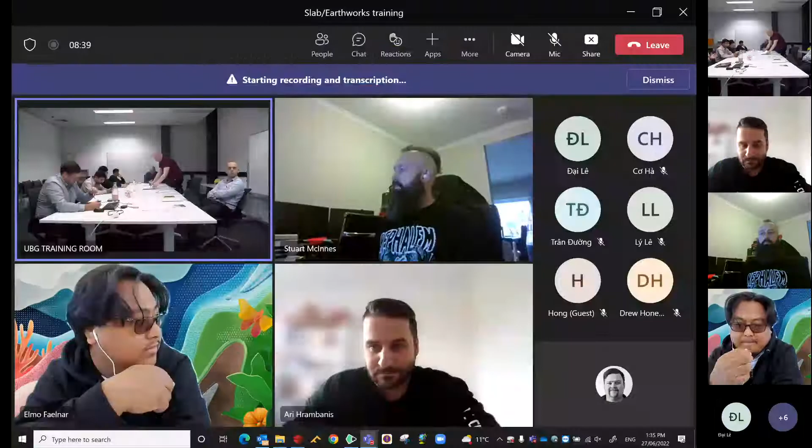So today we're going to go through Earthworks and slab. What did I just change? Slab takeoff and even piers, reading soil reports. Just pretty much everything, but that's a lot to go through. All right, so first thing we'll start with is

Elmo, you want to put yours on mute? Just a minute. The crashing waves are too noisy. What he really means is it's making me jealous. Wish we were.

All right. Yeah, so we're going to just start with Earthworks. Obviously, now that we have fixed rates, they are based on roughly 50-50, 60-40 cut and fill. So if we do have jobs outside of that, if it's all cut, so if the cut line's at the front and the whole rest of the block's cut, you'll still need to send it for a quote.

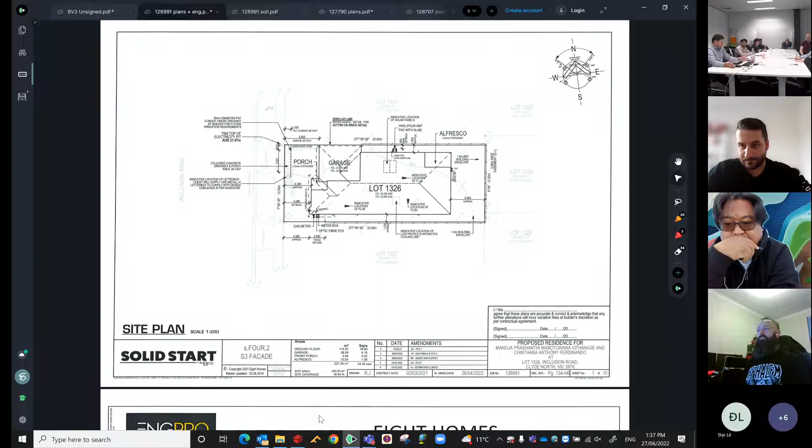It doesn't look like it should be at the front. We clarify and be like, please move this because it affects. Unless it's for driveway grading. Yeah. Yep. That's something to look out for because they can sometimes move it. It saves you a few thousand on your quotes sometimes. Yep. So if they can't move it, then just obviously send it for a quote. Yep. So for example, this job we're looking at is Inclusion, which is the 126991.

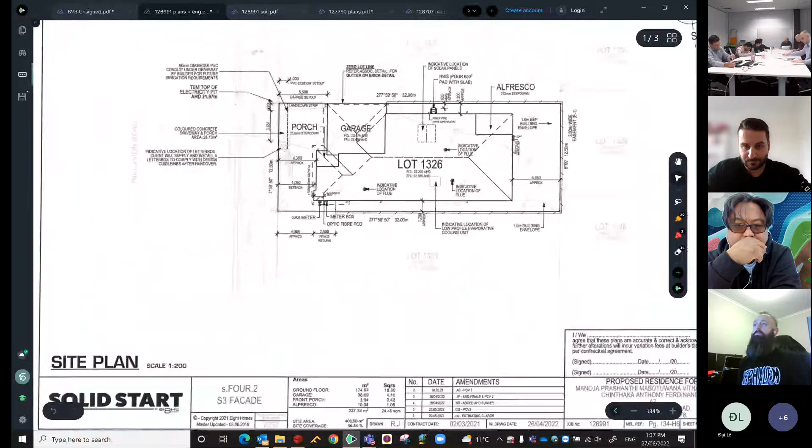So to start with, on the plans it says finished cut is 22.2. So, which is this dotted line. It goes back there and there. Why is that not? Is it delayed? There we go. Click, and it works. It's a bit slower than it was last time. So yeah, that's not a great example because it's probably 70-30 realistically, isn't it?

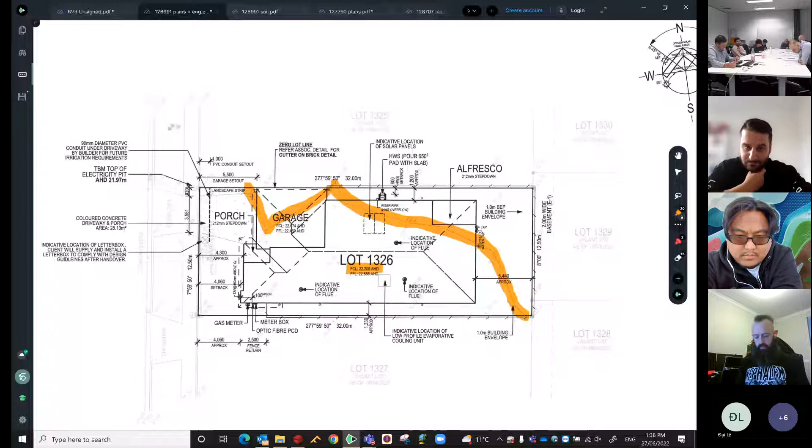What did you do in this case? Pardon? What did we do here? Well, you're still going to have to look at all the levels. So we're still going to look how much fall there is. Now, when we're looking at the fall, we're not doing the whole block. We're just working out the platform. So when I'm talking of platform, I'm pretty much allowing to go that area. There's no point going, we're not cutting all the way to the back fence, so we don't need to allow for the cut.

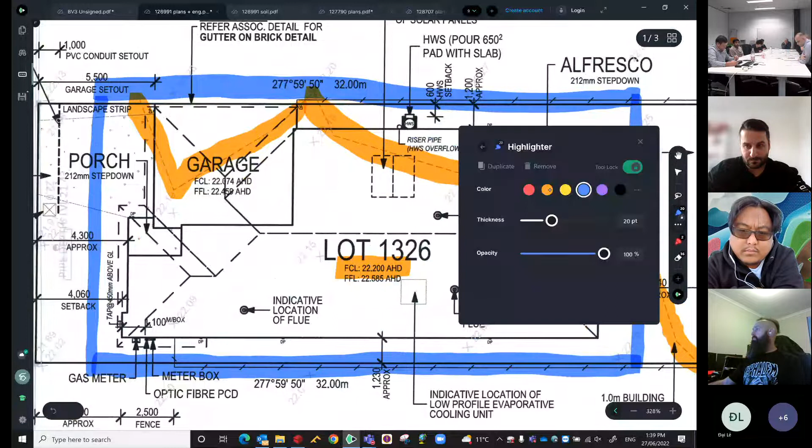So when we're talking, we're just talking a building platform, which is just a bit of a check. Yeah, it's a single. It's only like a metre around the house. So then you're going to try and, from that area, look at what your levels are. So we've got a 22.25 there, 22.16, 22.09. Like going outside it, you've got 22.02, 22.08.

Obviously the cut line is where that's, so by going off that 22.08 to 22.5, we've got less than 200 mil of cut realistically. Them levels aren't real good to actually be able to see them, are they? So for this platform, I'd give a 0 to 200 mil cut, realistically. Because we're probably filling, it'll actually be all right, I reckon, just using the rates, because it won't be exporting. We might have to import though, that's where it's tight. I'd rather still just send the 0 to 2, and if the ETO comes, I'd rather pay it that way than actually over allow. Overpay each time, yeah.

Yeah. So can you maybe draw one on the screen just with what a cut line would look like if it was definitely have to be? I've got another one. Oh yeah. That's why I said we've got multiple ones here. I've got a lot of different allowances. I see. So for this one, we just say we'll allow 0 to 200 mil cut.

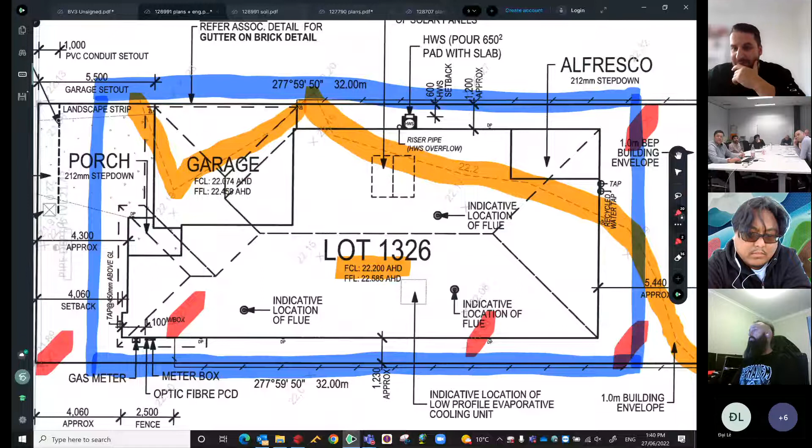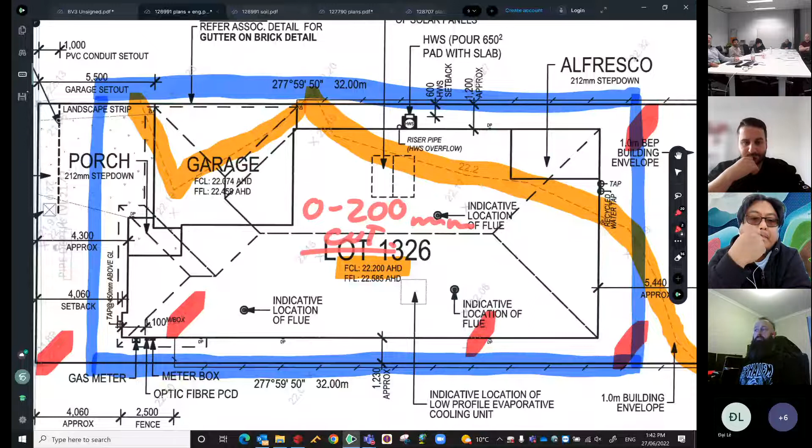Then I've got the engineering as well. Damn it, that's upside down.

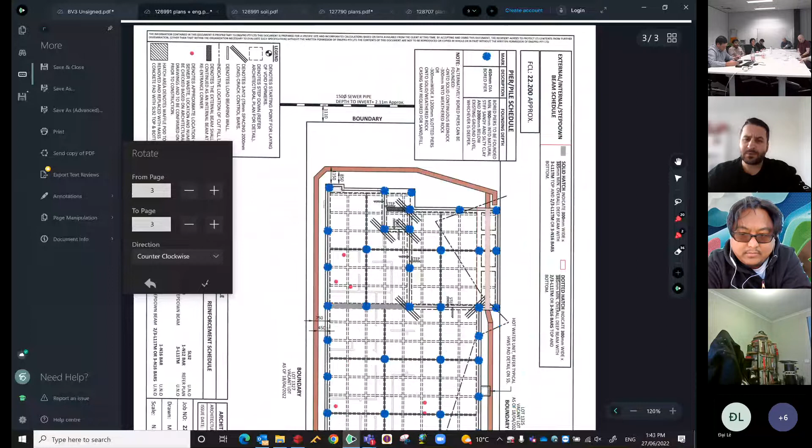And you've all got the soil report for this job as well, which is Inclusion, sorry. On the front page, obviously, P due to fill, quaternary deposits, so there is rock. The next page of it just shows where the boreholes were dug. And then I'm going to go to the third page of it, which is the depth of the bore log holes. So I'm going to bring it up.

So the things I want to explain on a soil report is explain what terminated means. So terminated means that they've stopped drilling. So they'll stop at 2 meters if they haven't got anything. So when it states terminated, that just means that they've stopped and you can still go further.

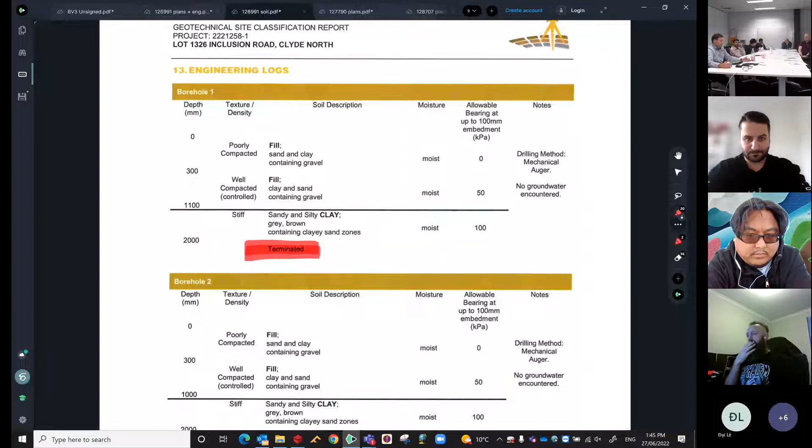So if, for example, we have piers on this job like we do, just flick back to the end, and it states, luckily enough, that they're 2 meters deep. Once it loads, the piers have got to be 2 meters deep, which is how far they drilled anyway. But if that said 2.5, for example, then we would still be able to drill the piers at 2.5 meters deep. So terminated means just that they've stopped.

Refusal, which I'll show you on another soil report, means that they've actually stopped because they can't get any further down. So the difference is refusal, we need to calculate the depth of the refusal to work the piers. When it says terminated, we have to go off what the engineering states how deep they need to be. So for example, this one, all these piers are going to be at 2 meters deep. All right.

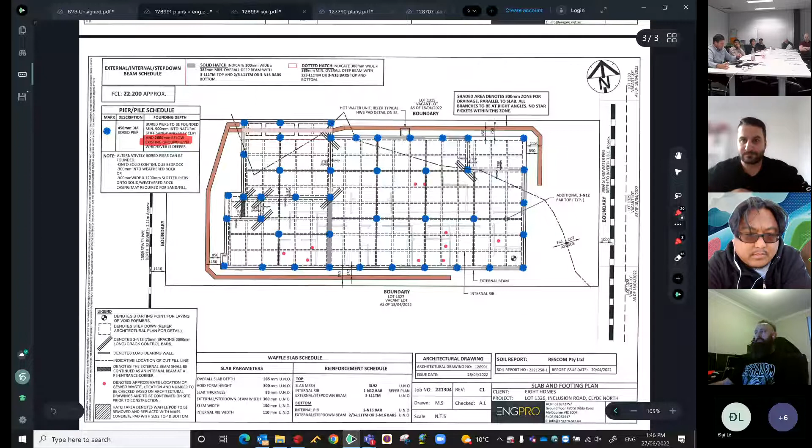So on all of them, all 3 holes, it states terminated. So we can go to the depth of 2 meters as per the engineering. That's just probably the terminology. If for some reason we have seen it before that they've got terminated, but they're all at different depths, usually we'll go back and clarify it with the engineer because it's probably wrong, that it should state refusal. Yeah, that happened to a job a couple of weeks ago.

Yeah. So they've usually been told to drill to 2 meters. That's when they stop. So unless it stated refusal at 2 meters, we know there's rock. But when it states terminated, simple, they've just stopped drilling. We can still drill further. So if we see a 2 and then a 2.5 and then a 2, do we just clarify, send it back to the engineer? More so if it said 1.8, 1.5 and 1.1, but it stated terminated. Yeah, that's where I'd be querying.

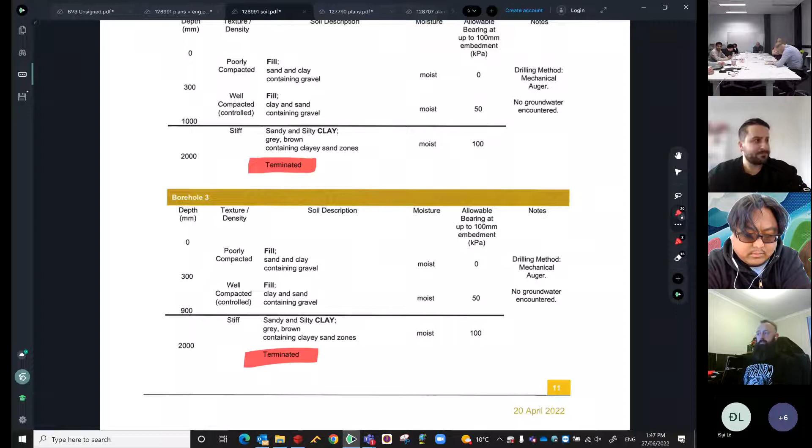Yeah, okay. But if it was 2 and 2.5, sometimes they do drill deeper. The only one is if one stops really early, you know, they usually hit something. Yeah, that just means when they've typed it up, they've done it wrong. Yeah. So on this job, all piers can be as per the engineering at 2 meters deep. So we could... freeze on me.

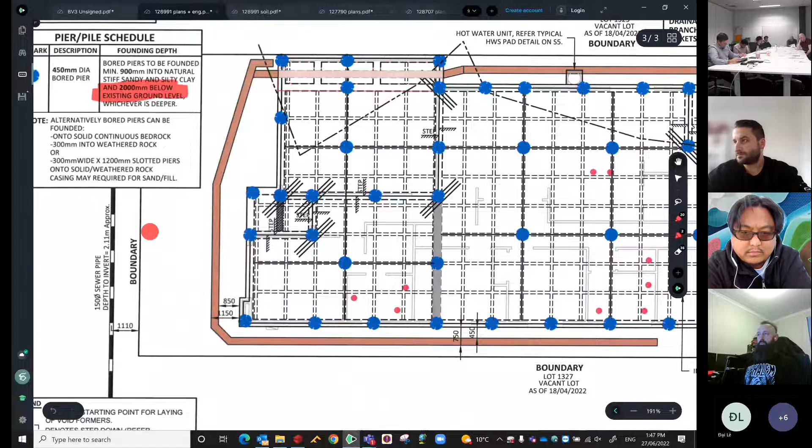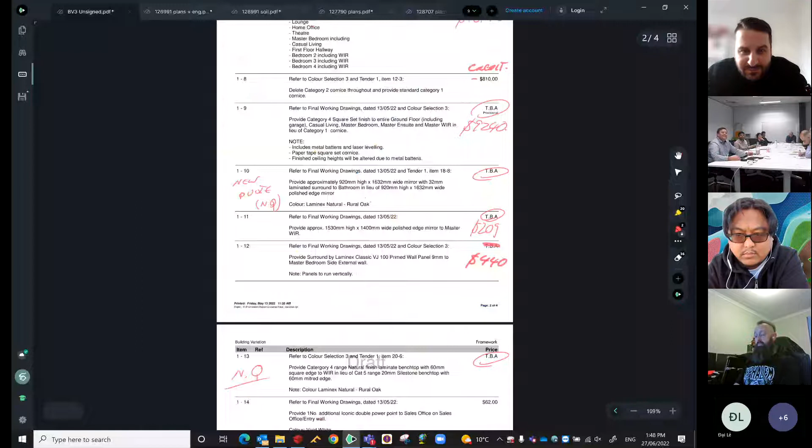So you can, use it still on my other document. Still on the tender, yeah. Yeah, it's coming. It's a BV. There we go.

So there's 42 piers at 2 meters deep. By putting it into the takeoff, it's going to work out the quantity, but we already know that there's 84 linear meters. So that's piers. When we are still doing slab takeoff, the other items we need to allow is...

Just a quick one on the piers. Are you going to add additional for the fill of the lot? Not really, because it's still going to be dug to 2 meters. So it's still going to be average. You still think it's going to be an average anyway, because even with the cut and fill, you'll be doing these after the cut, so they should all still be 2 meters.

Yeah, it was just like if there was a job that was close to the corner, and the majority of it was fill. Yep. So by the time you got to the corner of the lot, say that was 500 higher. Would you be making those piers deeper to factor the fill? Yeah, you'd probably work it out, maybe still put 200 on top.

So, because not all of them are going to be 500, it's only that far corner. Yeah. You can still work the average. Because I'd have done it the same way you did for this one, because it's pretty close. But if it's an extreme, you're happy for us to add fill on top of it. Yep.

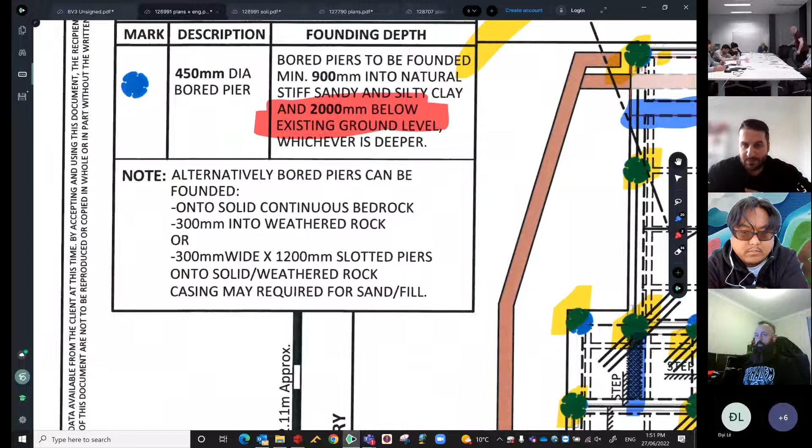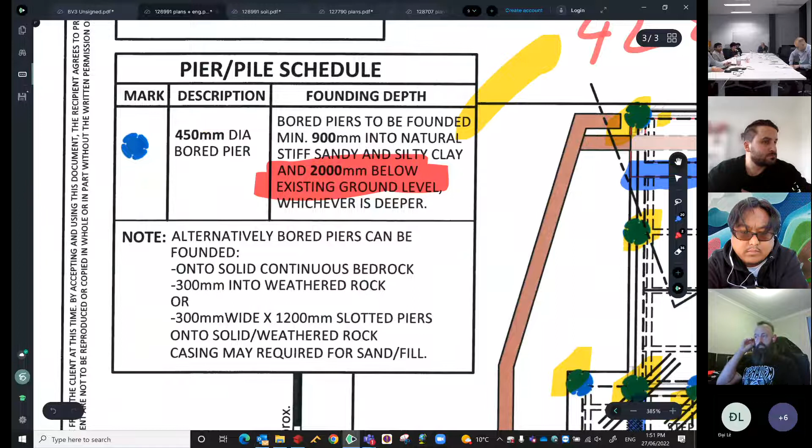All right. So we're going to continue with the slab. So we have, it's a 4B, N16. Come on. There we go. 3 L11 trench mesh to the top, 2 to the bottom, and N16 and SL92 is a 4B.

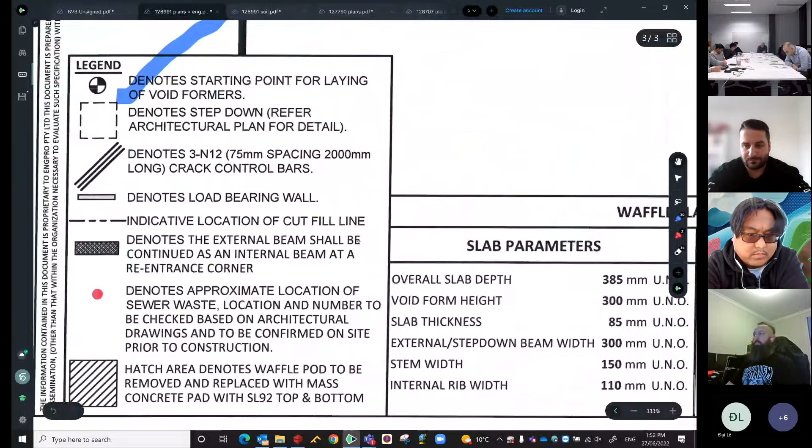So obviously the rate includes the external perimeter of the trench mesh. So the spots that I've highlighted blue, we need to add the additional. So it's got to be the same as the external. If you read the note over here, so the hatch section denotes external shall be continued the same as an internal.

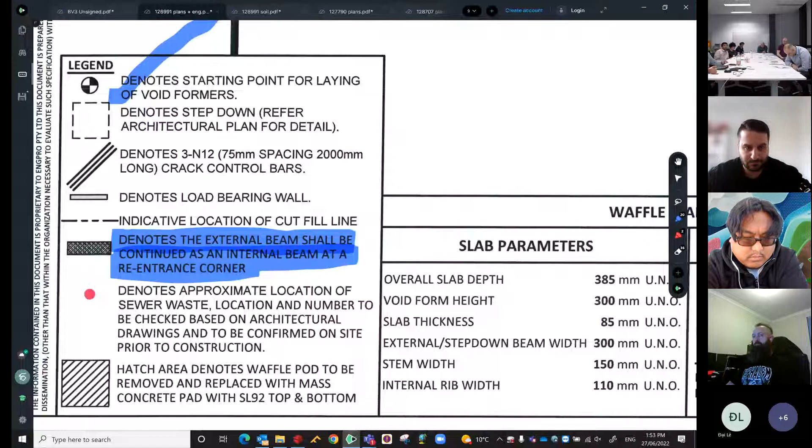So that means that we need to allow the extra trench mesh to go there, and we need to allow 3 layers of it because there's 2 to the bottom and 1 to the top. So by adding the lineal meters, why I'm not having the garage external is it's already included. So it's just the internal ones that are the same that we need to work the extra trench mesh for.

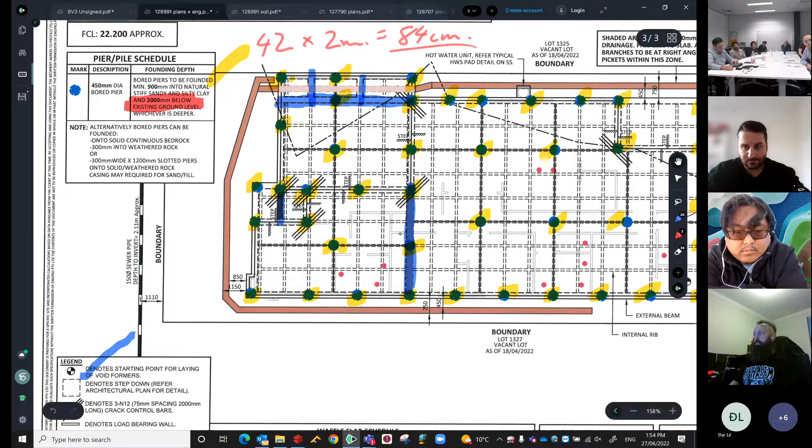So there's that one to the porch, there's the one going across the rear of the garage, and then the garage length plus the 2 going to the external garage wall. So you just work the lineal meters, so 6.5 for the garage wall, adding 1, so we're at 8.5, so we've got the garage covered, adding another 1.5 for that porch, so we're at 10, and then 1, 2, 3, 4 at 1.2, so you're adding about 4.5 meters for the rear of the garage continuing through.

Just so we're clear, because you're working out 1.2 meters per waffle pod, correct? Correct, yep. So the pods are 1.09 and the internal rib's 110. So just by calculating how many pods there are, that's how I'm calculating the length. Correct. Except for if it's cut, you can see the ones that aren't cut.

So for this, I should have brought a calculator again. So we're at, what did I say, 14.5. You times that by 3, divided by 5.4, tells you you need to order 8.05. So you round it up to be 9 lengths. Or I'd probably round that down to 8. That one's close enough to being 8 because you were allowing a little bit extra anyway.

So as it states up here, it tells you still 300 mil wide, 3-L11 trench mesh top and bottom. It's exactly the same for both of them. So just write down, you're gonna add 8 trench mesh. And we obviously have to order full lengths of trench mesh. We can't order half the length of trench mesh. So that's why we round it to the full number.

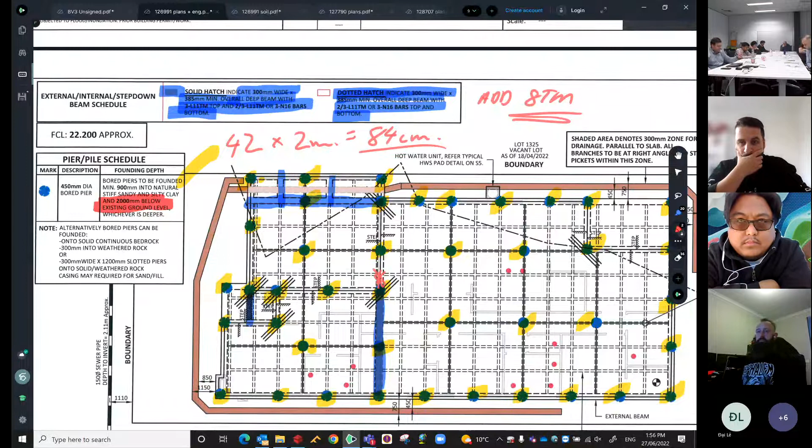Okay. The other thing we need to look at on this engineering is, because we've got piers, we've got N12 bars on top of the piers that we need to add and calculate in as well. So I used to do the same method of just working out by pods, because you're going to go 1, 2, 3, 4, roughly 4.5 pods is 5.5 meters. 2 dotted hatches, number 2 on top.

There you go. I thought Stuart was trying to say something, but you could barely hear Stuart. Oh, really? Yeah. Crank the mic up.

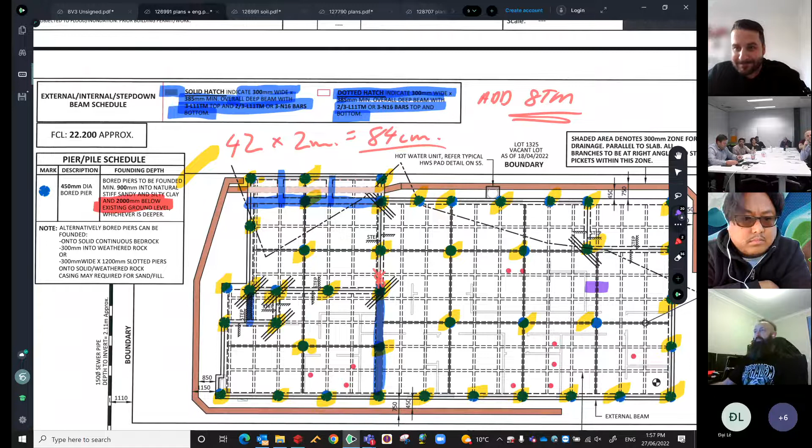There you go. So Stu just picked up that 2 top. So that was the garage one. So the garage one, I'd be adding 2 extra lengths, sorry. So we've got 2 top and 2 bottom for the garage length. So that would alter 8 to be 10.

Because we're adding an extra 6.5 meters plus 1 plus 1. You're at 8.5 meters, and they're 5.5, so we'd be rounding it up to another 2. So 10, we'll order 10 trench mesh. Good pickup, Stu.

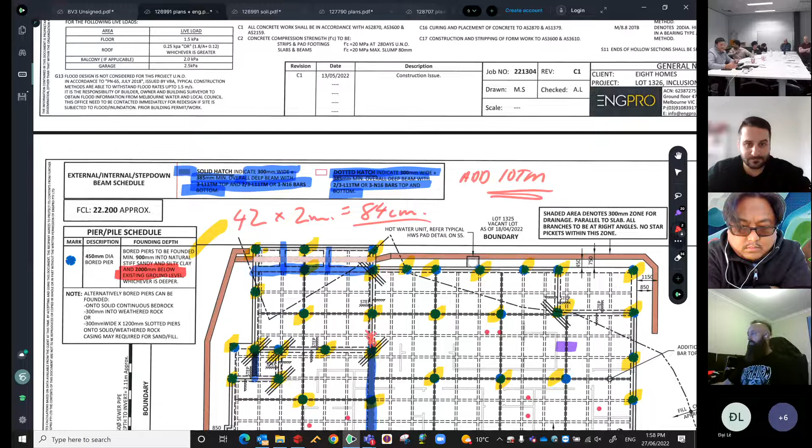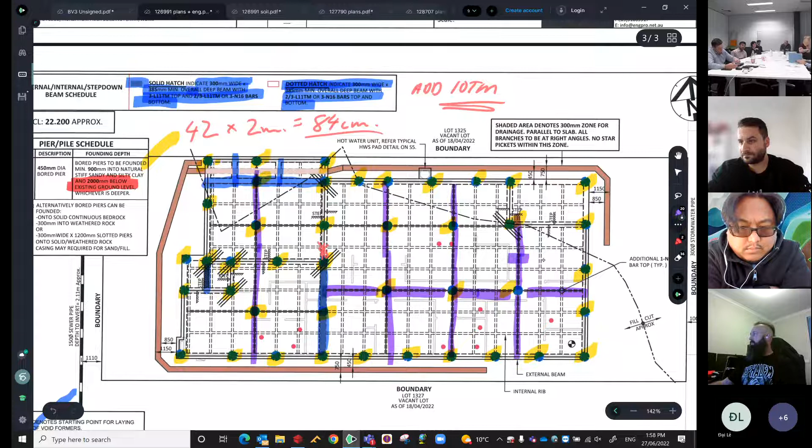So then we still need to add the N12 bars, so these black lines that are on top. So we need to work out how many. The other thing you could do is work out the width of it. Pretty much it's going to be 2 across, and just count them across. So 1, 2, 3, 4, 5, 6, 7, 8, 9, 10, 11, 12, 13,

14. So I'd be allowing another 14, but we obviously have 5 as standard, so we're going to make it 19 we have to order in total. So I'm going to add 14 for that.

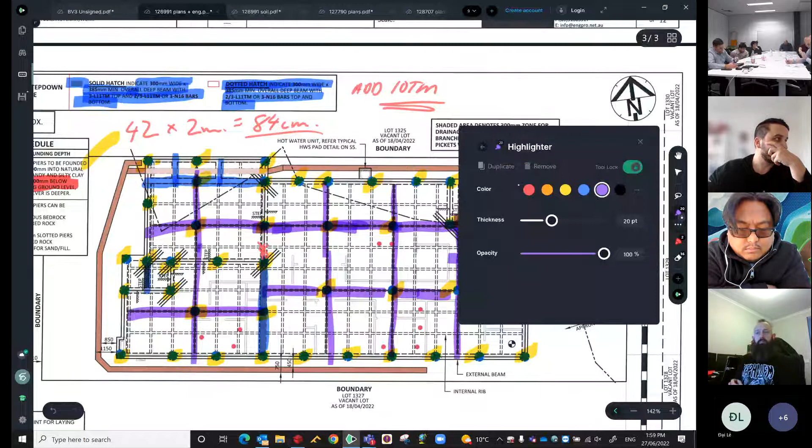Down there's probably around the alfresco, that front pier. You look across the front of the garage as well, there's a whole one there as well. I think across that whole front would be bulking, it's the same setup as the garage. Yeah. Yep. So same, we're going to just work out from that the linear meters by 300 by 300 to add additional concrete into the slab. And that's just bulking.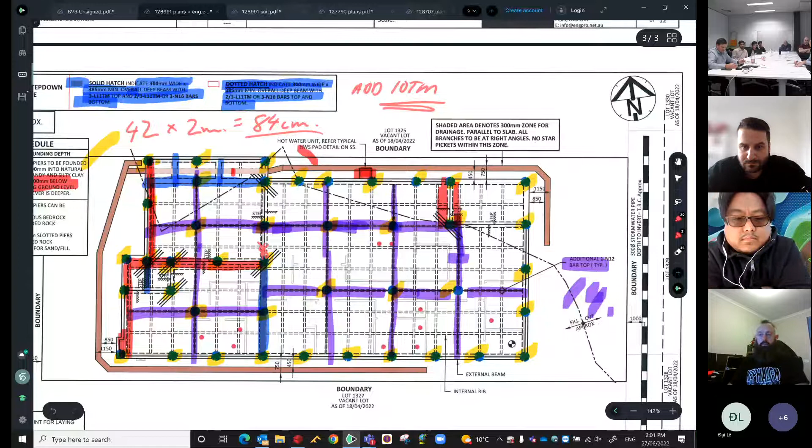You've got your meter squared rates for the rest of the slab. This one, we don't have a condenser pad, so we don't need to worry about that. But it's the same, even for bulking, you could add an extra meter for the concrete going on for the hot water service as well. And you're just double checking that there's nothing else that we need to be adding, and that would be that job done for slab.

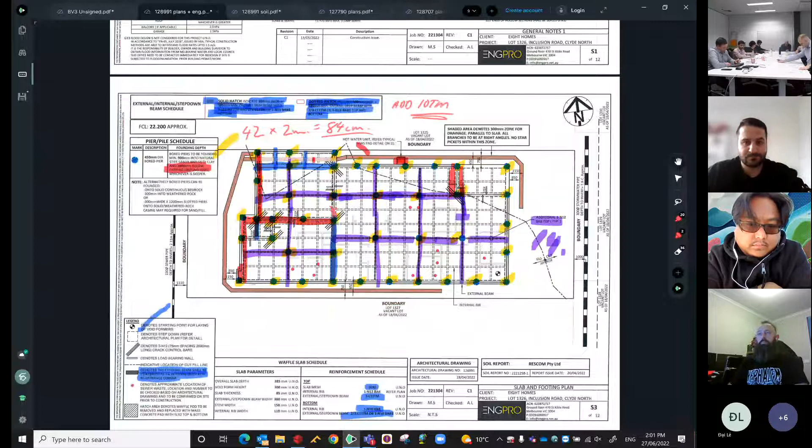The next job we'll just look at, site plan, is 127790, which is 1455 Hardwood Grove. This is just a site plan. Now, this one we're just going to look at the cut realistically. As you can see, the cut, you look at the level on the porch, under it says lot 1455, it says the cut is FCL, finished cut level is 100. So the dotted line that they have at the front of the block is at 100.

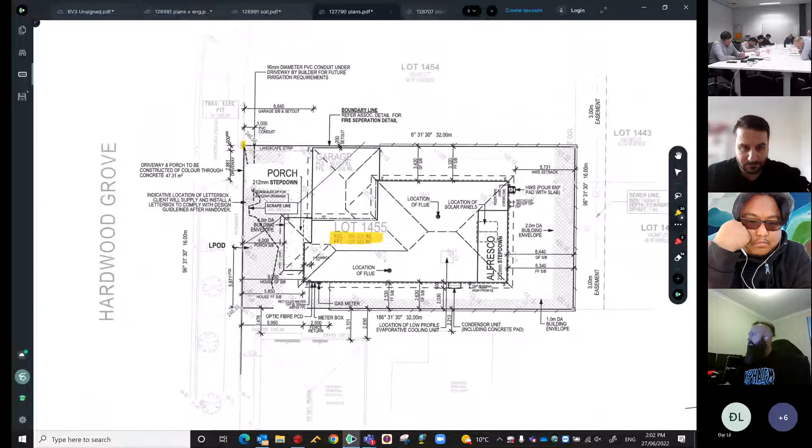So this is where we're saying we're not at 50-50, 60-40. Now I was a bit cheeky with this one. I tried to put it through at the cut level, how much falls on the block, because it's pretty much just a scrape, the whole thing. Yeah. But obviously, because they're taking more soil away, they hit us up for an extra, didn't they, Ari? They sure did. Hit me up this morning for an extra 1,200. So 1,200, just pretty much getting rid of the soil. Yeah, I think they calculated 140 cubic meters of soil exporting.

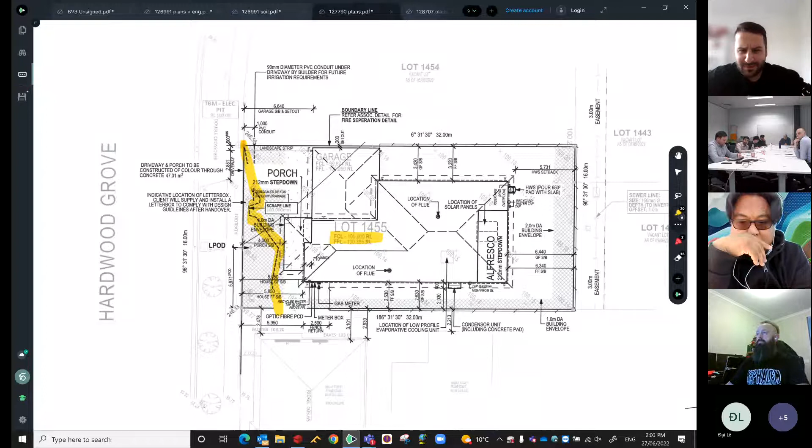But yeah, it's the same principle again. It is a single, isn't it? Just double check. No, this one's a double. Okay, so it's a D6. So the platform, realistically, we're going to allow is 2 meters. So we'd be allowing pretty much 2 meters all the way around to work out the platform. And as you can see, if the cut's outside of that as well, it's telling us that you're pretty much cutting the whole platform, which we are. So for this example, we would actually just need to send it off for a quote. Yeah. Right. There's not much else we can do.

You can go back to the drafty and ask the question, exactly right: why the hell have you cut it there? Because to me, there is no reason to. Explain to me why it's there. The only things that I could think of, especially with these double stories, is wall heights and setbacks and all that sort of stuff. But yeah, we can just ask. But that's the same thing though. If there's a wall height on the garage wall, you can just move it over. They've got an eave across the front. We can run an eave down the garage.

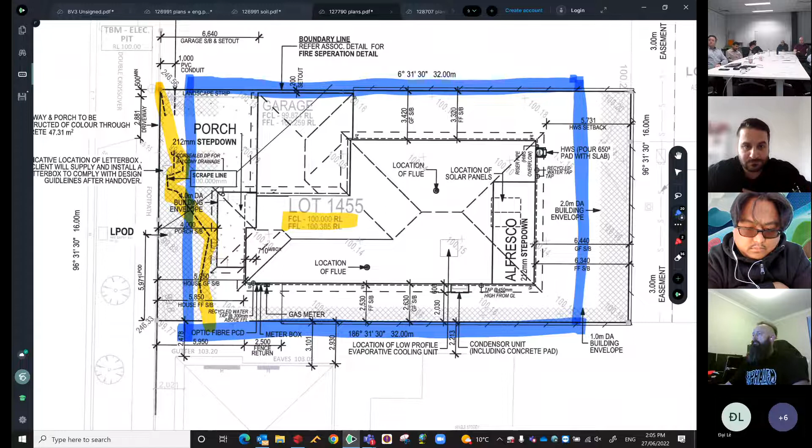And it's not an eave, it's actually, so we're sitting on the tails, you'll have a rake on the ceiling in the garage. So it's possible to get away from it, but they've got to learn that they're costing us by doing that. Yeah. That's the big issue that I need to sit down with drafting and have a chat to them. I was going to get Brownie involved as well. Yeah, have McCabe, Solomon, and Hayden. So if that's the whole reason they've done it, that garage wall and boundary, then they've just cost us more than $1,000 realistically. Yeah, it was 1,200. But it still would have cost me probably about $250 to do the rake on the garage ceiling. So still, it's about $1,000 it's cost us, just by the way that they've drawn it.

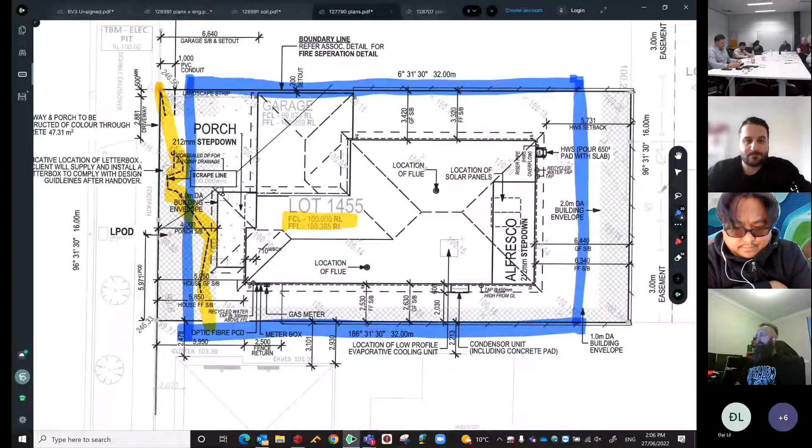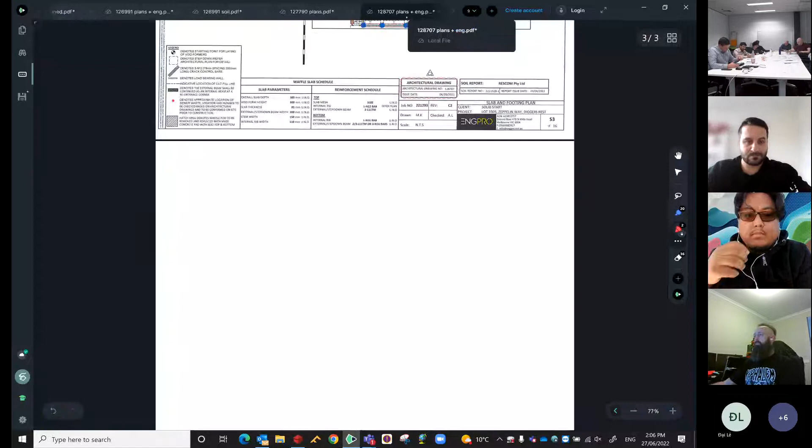Yeah, I think it's definitely worth a clarification each time. Yep. So if you've got it, always clarify it. That's a good point to make. And I'll be taking these examples back to them. So that's just one site plan that we would need to have definitely loaded. All right, I've got another one that's just a site plan. Nope, not that one. Smokehouse. Which is 13263, and that is Smokehouse, correct.

So this one's a single story, so an S8. Where'd you go? Now we obviously have, this one's got a big block because we've got a 14 run to the back of the house, to the back of the block. It's a great block. The block is 723.

So the inclusions that are on the site cuts is up to 450 meters squared. So we don't need to pay additional for this one because we still only work the platform that we're cutting. We're not cutting the whole entire block. So it's a single story. So we only need the meter around the outside. So the block is bigger, yes, but we don't need to for the site cut. We're still only working a platform.

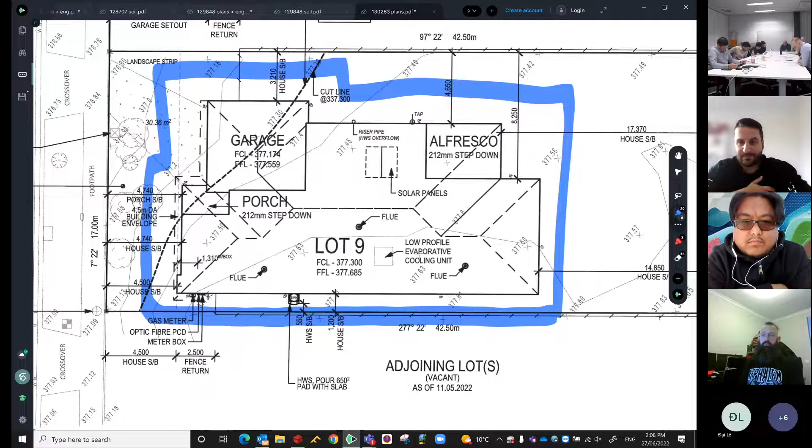Now, that cuts pretty close to the front again. Yeah, I got an email from Marvel. Yeah, again, it's questionable. We just send it off as it is and then see what happens. Like you said, if it comes back with an ATS, then it's a good ATS because we tried to get away with the fixed rates. Yeah, we're trying to get away with doing it as tight as possible, realistically.

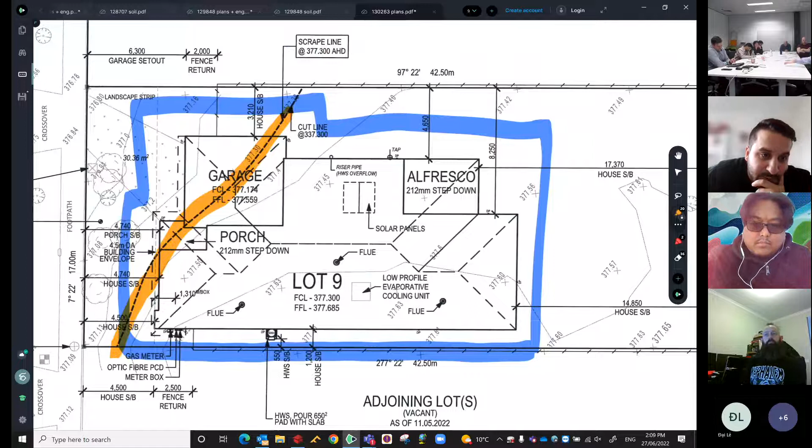Again, it's probably like, can the cut line just have been moved over to the 377.4? You know what I mean? Or yeah, that's just the same thing, questioning. Like to me, this one has got, let's see, 377.3, 376. So I'm tipping they've cut it there for driveway gradient, because if you look at it, the street level, 680. It's about half. Street level there is 376.78. Yeah. So you've got 500 mil plus the slab on top, you're at 8.

You could, but your setback is 6.3. So you probably still could have gone back further. Yeah, you could have gone back at least that. Yeah, definitely 100 mil. So, but yeah, we would still then just look at the levels that we have inside. So 377.61, 377.56, you're 45, 377.16, 377.2. That's 775. So realistically, 16 is probably the lowest, to 50, 60. So you're at 400. You'd be at probably 4 to 650. That one is 37.75 and the house is at back.

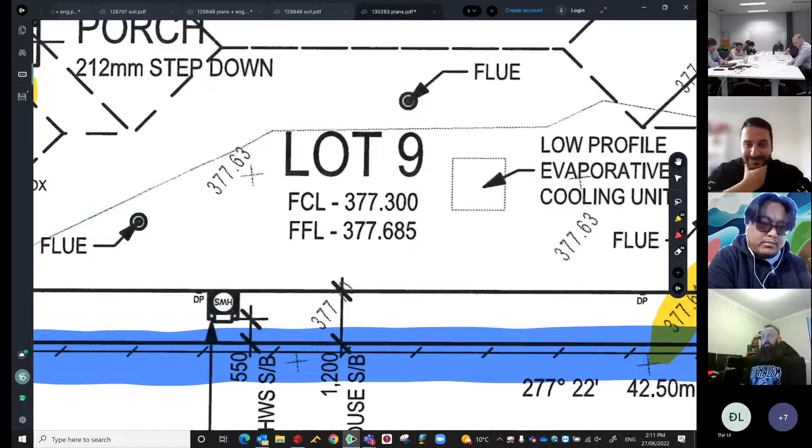Is that 7? I can't even see that behind that dash. It could be, but yeah. Well, that's our excuse that we'll go back to. Can you tell me what that is? Yeah, it probably is a 7. Yeah, it probably is. But even if you did go to 7, realistically, you're still falling the same, yeah. So you've still got 650 up to 654 realistically.

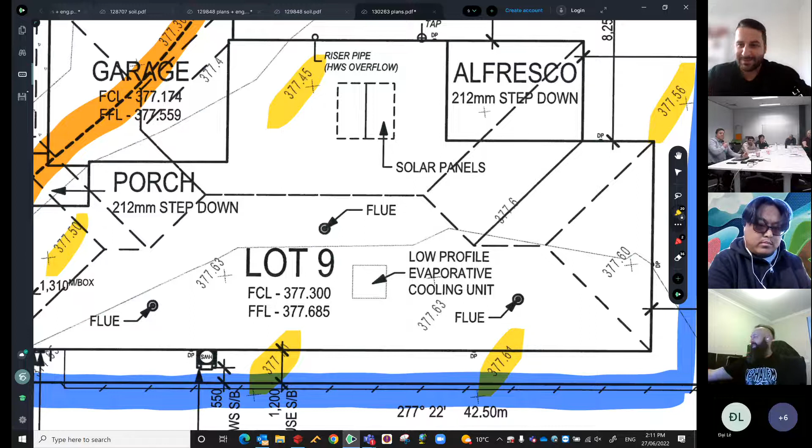Yeah, just double check it because I had one from Marvel saying, "Oh, this one's 400 to 600," and I looked at it. I'm like, "No, it's not." And then they're like, "Oh, yeah, my mistake." So don't be scared to double question it as well. Yeah, they're only going to try and push for more money, realistically. If we can push back, you can always flick it to me. I'm always happy to argue with people.

So, yeah, for this one would be 4 to 6 ordering that, and hopefully we're getting away with the cut, but we would say, yes, we want to clarify that cut level. Just to move it back that touch would be even better. Like even if you could try and say, cut it at 377.5, you're in between. If you're cutting it at 377.5, you'd be going through that section, which you're almost at 50-50. So you can use the rates. Helps everyone.

Yep. So it's just knowledge of looking at the cut, and drawing that box actually helps the platform to say, right, you can see how much of the platform is where the cut is and how much we're filling and how much we're cutting. So it's a good guide to look at it that way. All right, so that was just another cut one. Another one to question drafting. All right, go back.

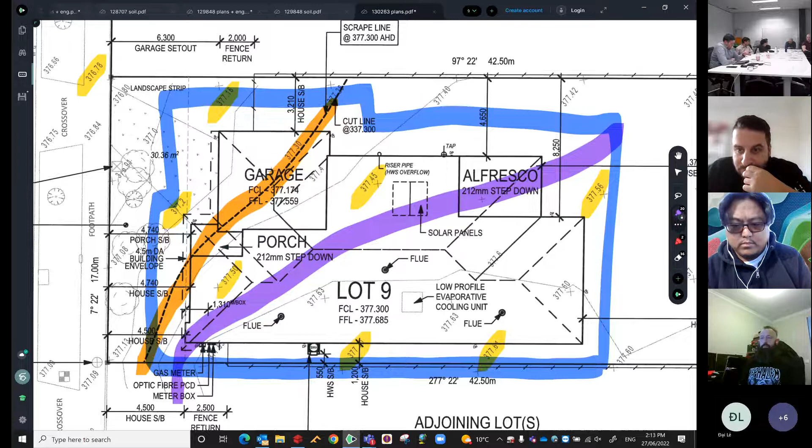That's a good question. Some of them are, some of them aren't. What was the question? Are drafting aware of what we do, realistically? Yeah, like our parameters for it. Which I've been giving feedback to McCabe's team on, because he hasn't been doing anything. Where he's been cutting them, I've had to go back at him and say, well, work out your driveway gradient and then tell me if you can cut it there realistically, because he can't. He's not always looking at that.

Sorry, just a random question. Have we ever built a house where we've dropped the garage to deal with driveway gradient? Is there a reason why we don't do it more often? Yep, it creates issues. We don't do deep edge rebates, or we try not to. Our concreters hate them. It causes issues, obviously, because we're cutting two different cut levels. Where's the water go? It goes to the lowest point, so it usually goes under the garage if it's not getting rid of it.

That was one thing they were drawing that I've told them not to draw ever again: deep edge rebates. They were doing it so they didn't have to do retaining walls. But our process here is we retaining wall a level platform, then we build a house on top of it. So if you come across any with a deep edge rebate, clarify it. Is it for warranty? It's mainly just to keep our concreters happier, because I've seen it drawn and they miss it, and it causes more issues.

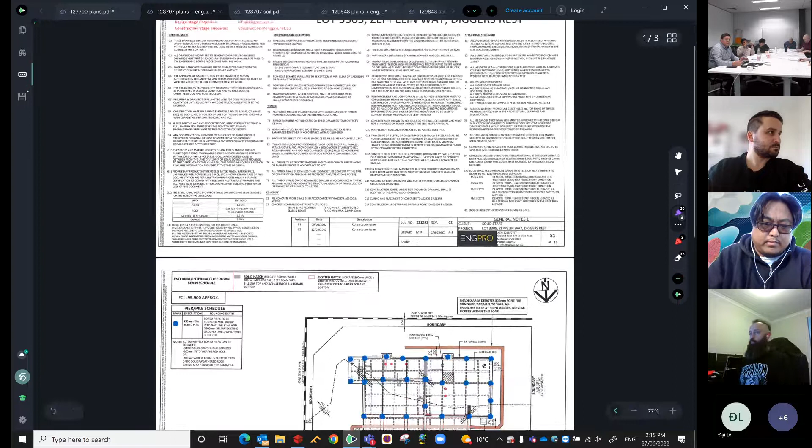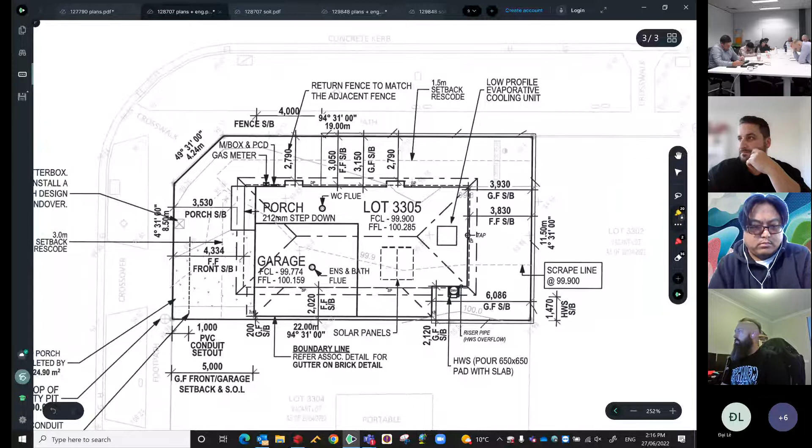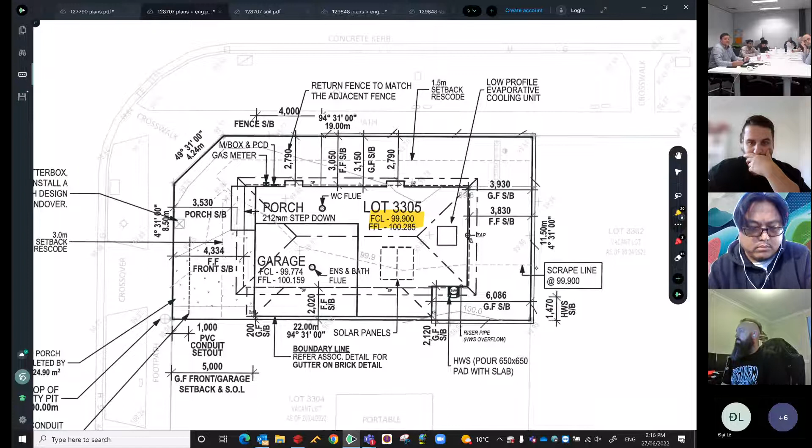All right, we'll look at this one. Obviously I scanned this one in the wrong way. Zeppelin Way, Diggers Rest. This one's a Zooey 121, so we've got a double story. The finished cut level was 99.9. This one is all good, in my opinion, to use the rates once it draws the rest of it. There we go. You can see it's close enough, 50/50, 60/40. I'm happy to use the rates for this one. It's a double story, so we'd make sure the platform's got a 2 meter platform around it.

We're going to look for the levels inside the area. Still waiting for it to zoom. I'll start marking up the levels anyway. At that point down the very bottom, we've got 100, so we're cutting at 99.9. At that point there, you're at 99.8, so we're at 200 mil. You're at 220 now with that level at 99.78, so we're going to be over the 200 mil. So we'd be using the 201 to 400.

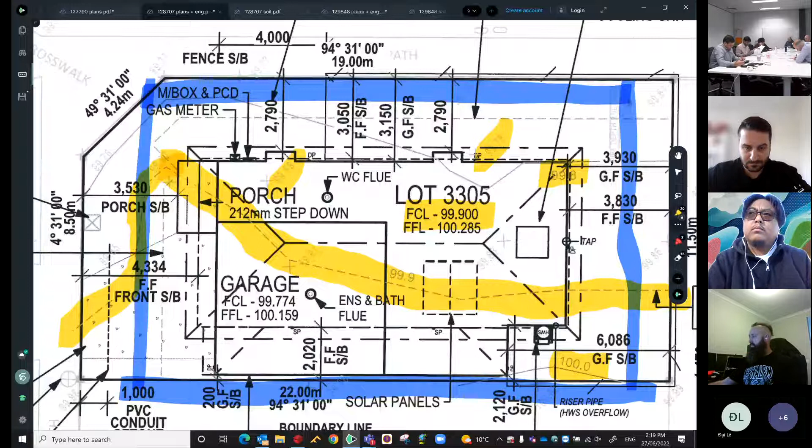From this we go to, sorry, this goes to 2, 3. Training at 3 o'clock, it's booked in. They're all booked in for an hour and a half. I think someone had it after us. I just wanted to make sure we're not going to run them over. Okay. All right.

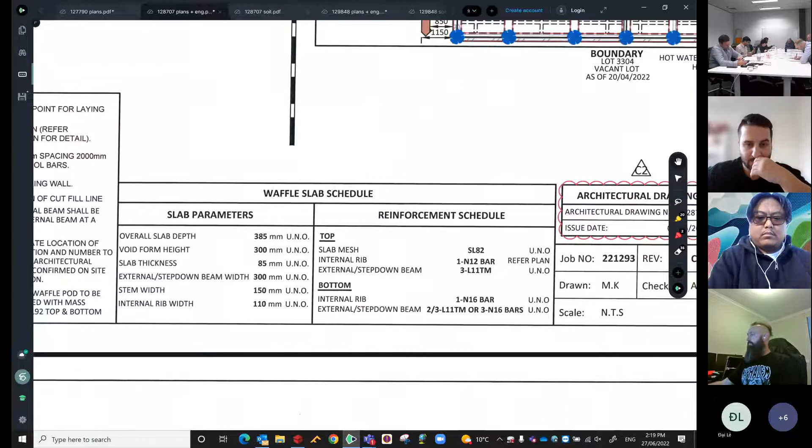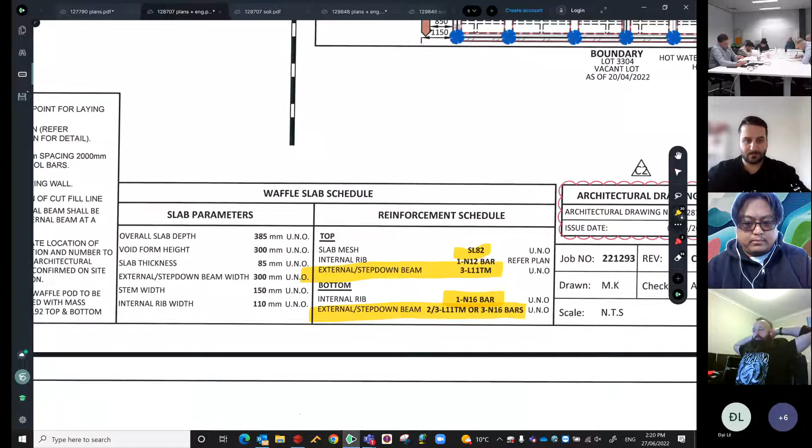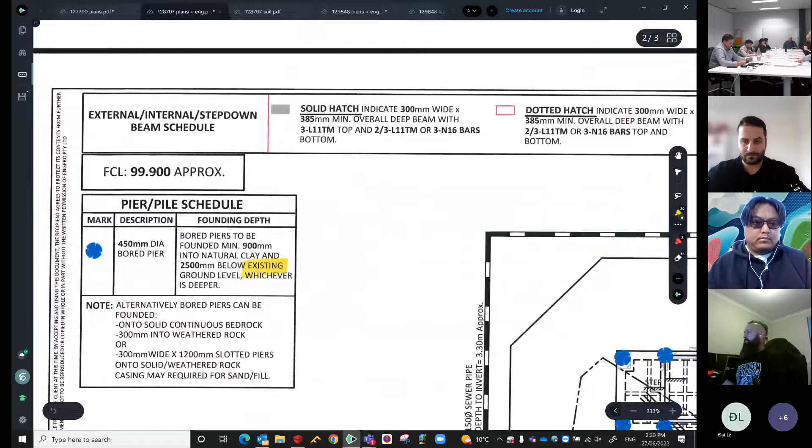Mostly you'll find they are the same slab, a 4B. Obviously this one will downgrade the mesh because it's an 82; the 4B comes with a 92. It's a 4B again. It's got piers. This one states to be 2.5 below existing and 900 into natural clay. So we'll go to the soil report. That's not the garage, is it? Yeah, that's one. There we go, Zeppelin soil report.

Now, looking at this, come on, scroll. Why are you not moving? Should we be looking at the borehole? There it is, it's finally come up. As you can see on this one, it states refusal on moderately weathered basalt or boulder, so we are hitting rock. The first borehole stopped at 1.3, the second stopped at 800, the third stopped at 500.

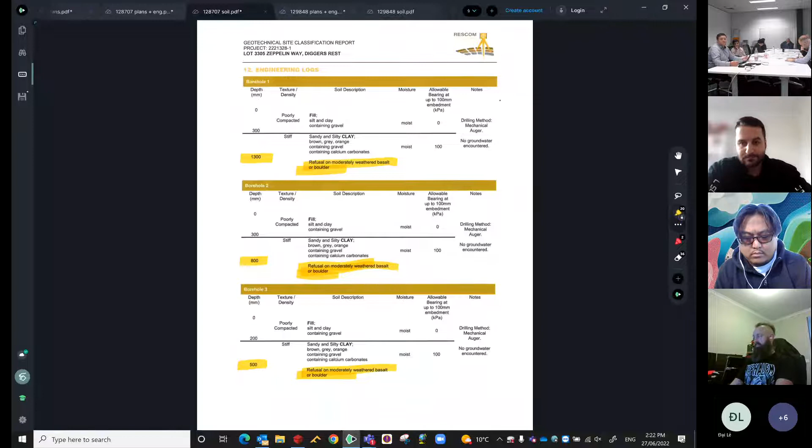So for the piers for this job, I average the depth. We go 1.3 plus 0.8 plus 0.5, which equals 2.6. Divide that by 3, so you're at about 860. I'd round it up to 900 mil. So you work out the boreholes, and the piers are at 900 mil on this job. Everyone good with that? So we go back to the engineering.

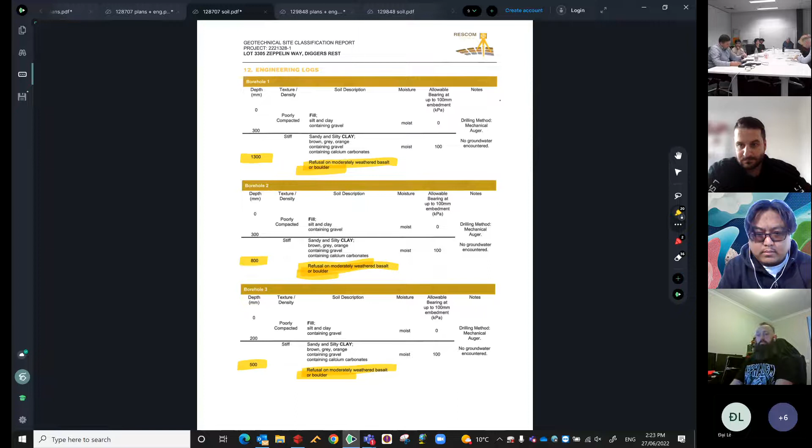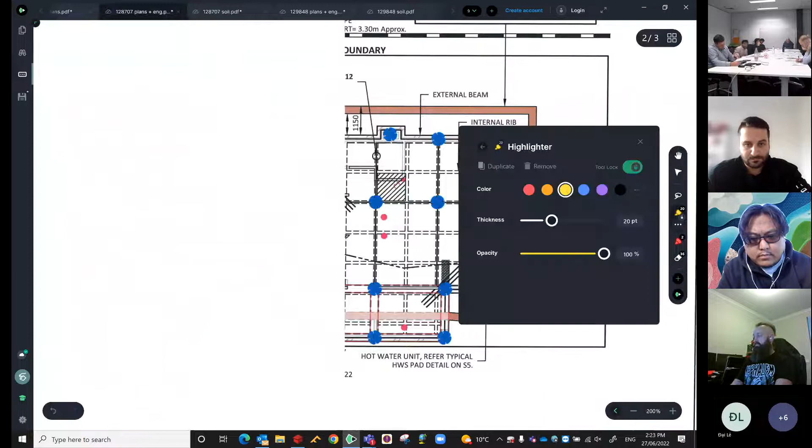Count all of them. 1, 2, 3, 4, 5, 6, 7, 8, 9, 10, 30. So there's 30 piers, times it by 0.9, there's 27 lineal meters. So that's what we'd be allowing for in labour. So 30 times 0.9 equals 27.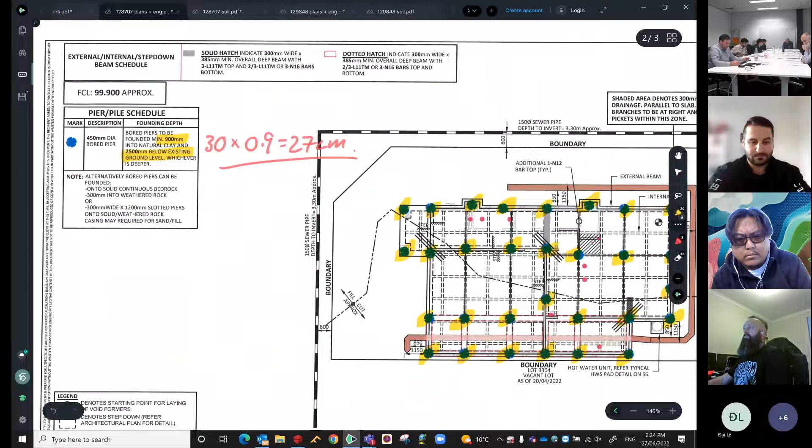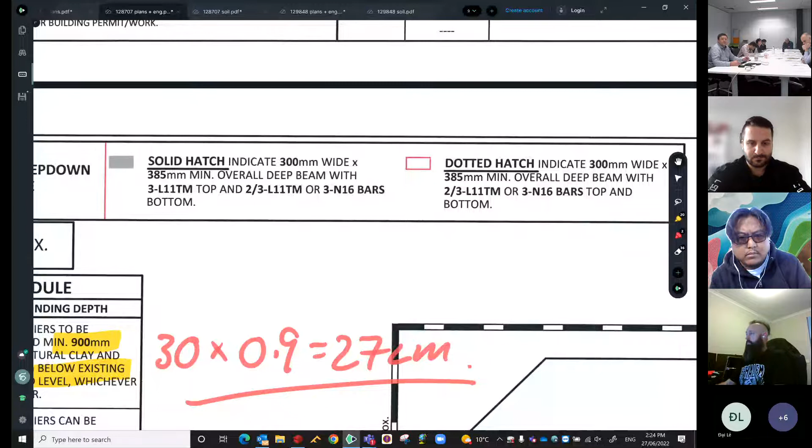That's all we work out for piers on this job. Then we'd be looking at the same again up the top, the solid hatches. This time I'll double check them, Stu. Actually, the same one, the clear one with the red line, states 2 311 trench meshes, top and bottom. And the solid hatch states 311 to the top and 2 to the bottom. So I'd work now that you picked up that they're different.

We'll do this one. This one's blue. That one's purple. So purple one's the rear of the garage again, plus a re-entrance. So realistically for that one, you'll be looking at 3 meters. Hold on, it's still freaking slow.

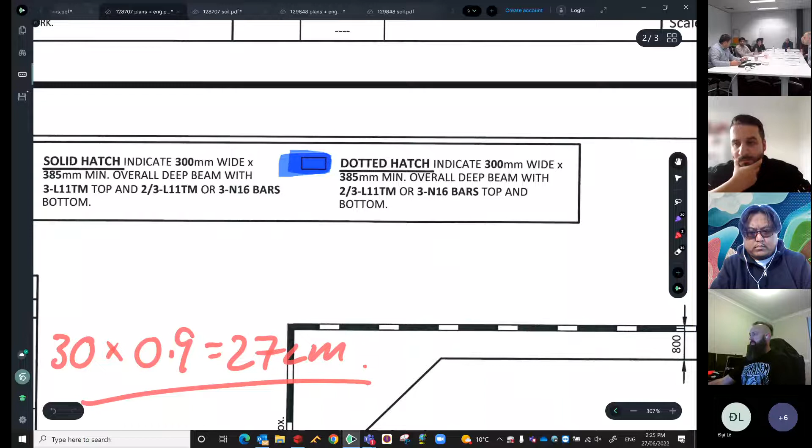Hey Steve, you know that 900? Shouldn't we add the extra 300 in the note? You pretty much, they'll probably change them to slotted on site realistically. Yeah, because if it's not all of them will be, who knows? If all three boreholes have hit, then yeah, there's rock the whole way through it. It says weathered basalt or boulder, so a boulder you're not going to go 300 mil into. So more than likely they'll change them as well. They'll go to slotted because they won't dig into the rock.

Yeah. So I usually just go to the rock, and I don't think there's been any issues for them chasing us up for those extra linear meters if we don't go 300 into the rock. No, because they're not really gonna sit there and drill into the rock. Yeah, because if you've got 30 piers, they should be chasing up for an extra 9 linear meters realistically. So we're getting away with it. But it's a site condition anyway if it does go to slotted piers. Yeah, correct. Don't be starting a precedent.

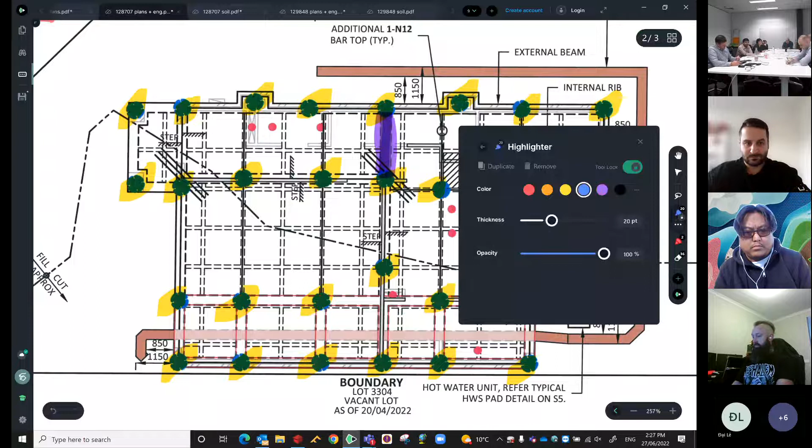Alright, so on the purple, we'll go 3 linear meters, 3 by 3. So 9 linear meters, you're gonna need 2 lengths of trench mesh for them. Whereas the other one, which was blue, we're gonna go 2, 4, 6, 8. And I believe it was about 13 meters across there. So we're at 21 linear meters. 21 times 3, 63. 63 divided by 5.4 to work out how many additional trench meshes, which will be 11.66, so we'll round that up to 12.

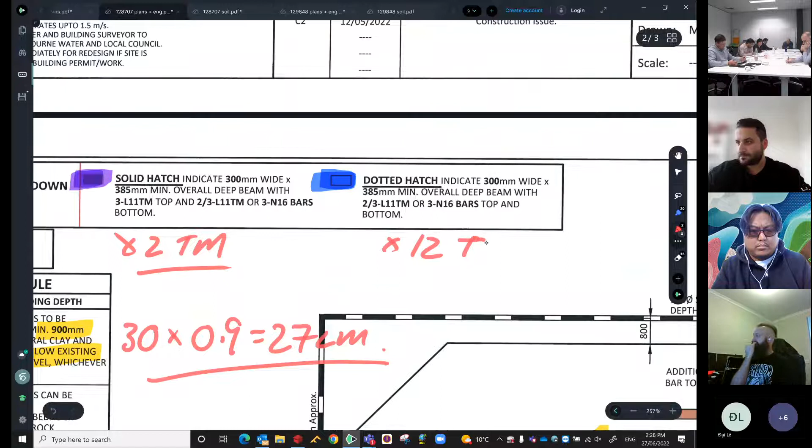So I'll just note that here. This one we're going to add 2 trench meshes. This one we're going to add 12 trench meshes. That's a good aim. So we're adding 14 trench meshes in total.

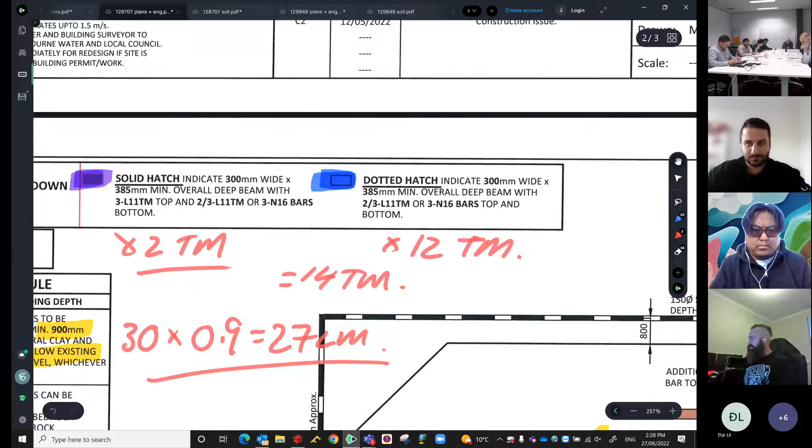Same again on this one, we'd then be looking at the N12s that are above the piers. So 1, 2, 3, 4, 5, 6, 7. 7 additional, plus the 5 is standard, so we'd be ordering 12. Then the bulking factors for cut boxes that aren't going to be put in as well.

The rear of the garage, they won't put that in. Front, down the side. The extra for the cut boxes there and there. You'd allow both of them. Another meter for that as well. This whole pod that's not going to get put in either, the hatched one. And you could probably go the whole garage. Same thing, then we just total the linear meters. So you're at 2, 3, 4, 5, 6, 7, plus 6.5, so 13.5. So they're close to being half.

No, they should be putting that in. If they're not putting that in, this is where we'll start making them pay for the concrete. So when it's close to half, yeah. Only if it's about 300 mil, 3 to 4, you go, because they'll roll over as soon as they put the concrete in, realistically. So if it's about half, you should be leaving it.

So then, totaling up all the linear meters of red, I'd pretty much just count the box as like 3 or 4 linear meters. Because you've got 1.2, so probably 4 linear meters. Instead of putting it in on its own, I'd just go, well, that's 4 plus, and then add the rest of it. So 4, 17, 18, 19, 20, 21, 22, 23, 24, plus 12. So I'd be going roughly about 36 linear meters by 0.3 by 0.3, just at a quick calculation. 36 times 0.3 times 0.3, it's adding in about 3.2 cubes for all that.

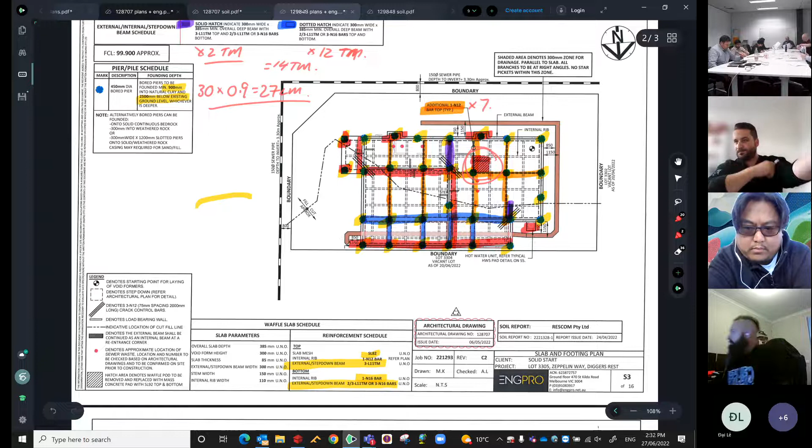All right. Meter squared rate for the rest of the slab is normal, and then we're done on that one. All right, so we've got only, I think, one more example to go through. We'll do the same again, both slab, the cut, and the slab. 1, 2, 8, 1, 2, 9, 848 Guernsey Street in Donnybrook. Little able, single story, wall to wall.

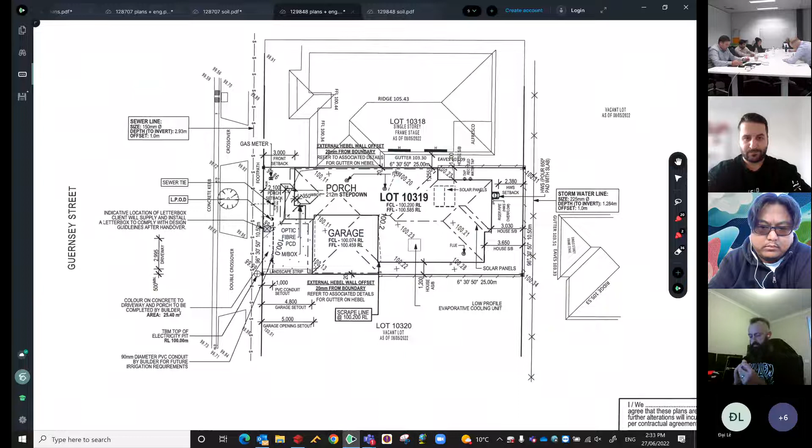So that being a single story platform is pretty much each boundary a metre in front, a metre behind. A metre in front of it and a metre behind. And then we find the cut level. It just states it's 100.2, which is straight in the guts. So we're good, 50-50, pretty much.

Then we just need to work out how much fall it's got realistically. So we'd be going, well, at the front we're at 100, so we're already at 200 mil to the cut level. You've got 100.28, 100.23. Well, if you look at the back of the block anyway, we're about 300 mil. So same again, we'd be doing the 201 to 400 cut for this job, once everything finally catches up on the screen.